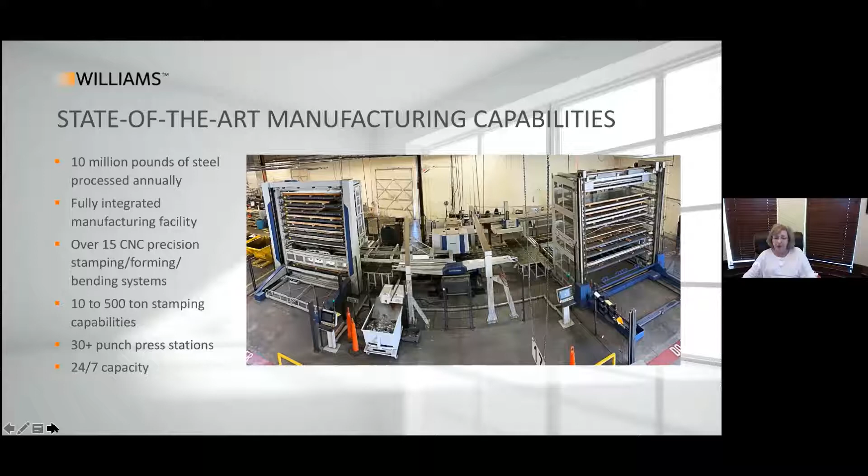Our furnaces ship in 2 to 3 days max. Fan coils at 6 weeks, but on the new fan coils we're introducing, hopefully we'll be putting those on the shelf as soon as we know what your needs are, so that those will ship in just a few days.

We do all different types of welding. We are a certified CSA test facility. So with our new furnace that we just developed, CSA can actually come to our labs and view the final product.

But you see all these wires that are testing everything. We do all of our testing in our own CSA approved lab.

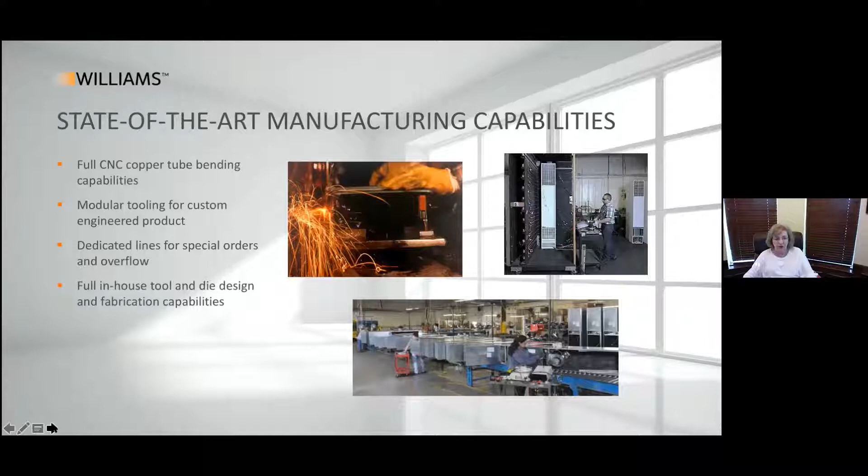Here you're looking at our factory floor where we've got fan coils down the line. These are the vertical stack units like you see in a hotel room, where you just see a grill on the wall, and that would be one of these inside the wall. Williams is a great provider for high-rise construction.

We do 100% tests on every burner that we manufacture, and we manufacture our own burners. What we're looking at here is the gas valve, the manifold, and then the burner control.

These are actually fired 3 times, and the lady runs a wand with a flame under it to make sure there are no leaks. I'm always like, oh my gosh, how does she do that? But she test fires each unit 3 times, every unit, and our burners primarily are stainless steel.

We have a few cast iron left. We're getting out of the cast iron burner business because there are so few foundries and it's uncertain how long they will be around. We primarily have stainless steel burners, and we're converting the few cast iron ones we have to stainless steel.

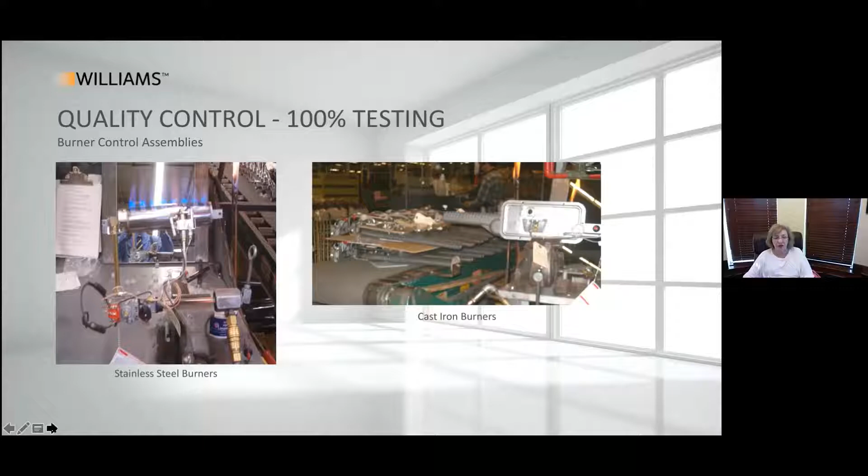Mary Jo and her team have just done an incredible job. When I look at how far we've come since last June or July, it's absolutely phenomenal.

If you find something that you think we should have on our website that we don't, please let us know, just shoot us an email. We're working feverishly to put together all the resources that are needed. Nobody wants to have to wait and talk to someone, you want the resources on a website where you can go and get them. So we're working diligently to do that.

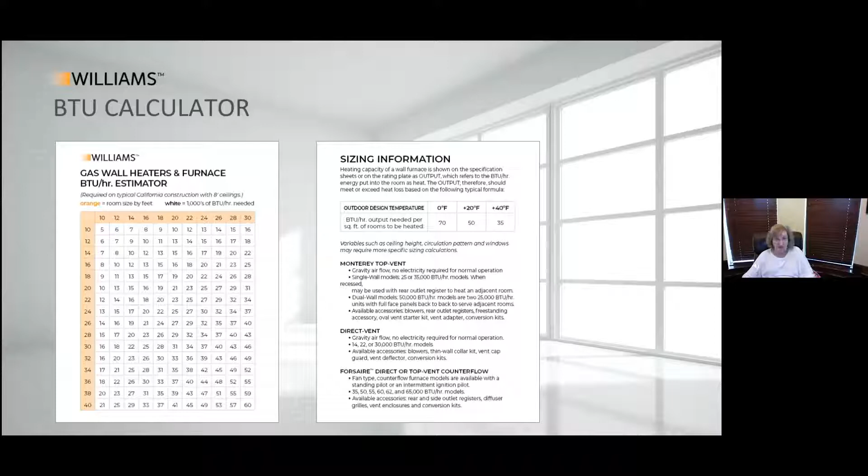Before we get into talking about combustion, where this unit is going to be placed is critical. You've got top vent units, which go on an interior wall generally, or could be a floor furnace that you vent up the side of the house or building, or it could be a room heater - those are the top vented units. Then direct vent units go on an exterior wall, because they directly vent to the exterior through a sidewall. So there are two types of products, and determining where you're going to install this unit is critical - where you have access to a gas line, and whether it's going to be on an interior wall or an exterior wall.

Of course, if you're replacing an existing unit, we do have a cross-reference, and in our exploded views we also list all the different products we have made and different model numbers, so we can assist you with those. If you have one that you're taking out and you don't know what the new model number is, we can help you with that, and we also have those listed in the back of our exploded views.

So what does it take for these units to operate, except for the electric unit? You need fuel, oxygen, and then you need a heat source or something to ignite the product, and then you have a perfect triangle for combustion.

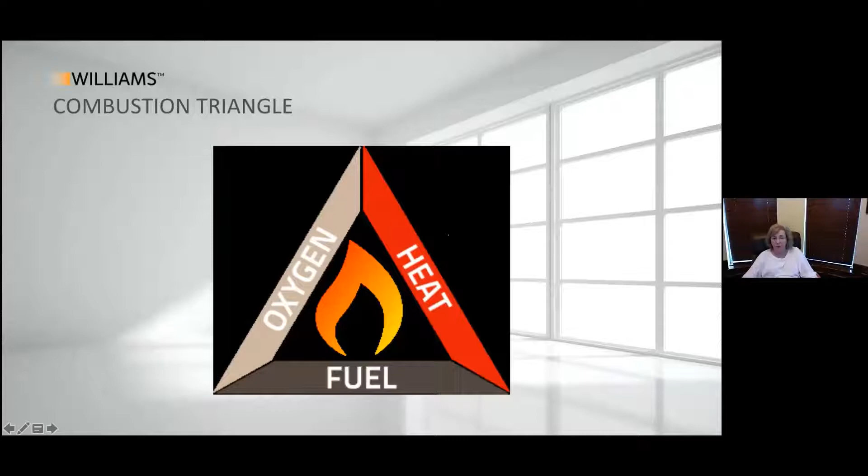When we look at the products of combustion for natural and propane gas, perfect or complete combustion gives you carbon dioxide and water vapor. We have a smiley face there because you want complete combustion. You have complete combustion when you have a nice, healthy blue flame.

If you see yellow or orange, you've got something impinging that flame, whether it's dirt, debris, maybe the burner needs to be vacuumed or cleaned, or maybe something is disturbing the environment. If you want a perfect test, just take your gas range and turn it on - you should have a nice, healthy blue flame. If you boil something over, or take a cloth that has some dust on it and shake it in the area of your gas range, you'll start to see orange and yellow particles, and the flame will not be burning properly. That's improper combustion.

When you see yellow and orange, you're going to get carbon monoxide, toxic aldehydes, and excessive water vapor and soot. When you have any of those, you have improper combustion, and it's very unhealthy.

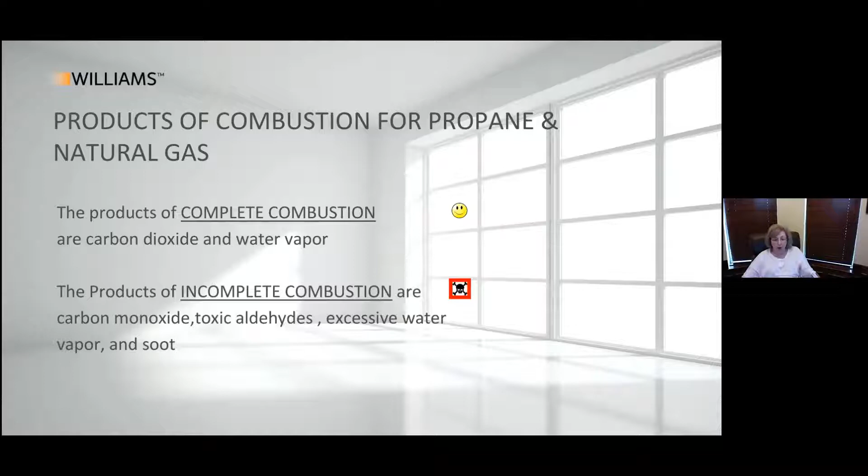So anytime you have an appliance and it doesn't have a healthy blue flame, you've got improper combustion, you've got those dangerous particles coming into the space, and you do not want that to happen. You want to get that healthy blue flame, and if you're not, find out why. It's usually dirt or debris. If it's on your gas range, it's because maybe something boiled over and it's clogging a certain area. So check those out.

What are the facts of propane and natural gas? For propane gas, the specific gravity is 1.53 kilograms per cubic meter. For natural gas, it's 0.65 kilograms per cubic meter.

The specific gravity of air is 1.205, and the same for natural gas. Propane requires 11 inches water column for the manifold pressure - we're going to talk about that a little bit later. It's really important, if you get a troubleshooting call or someone says the unit isn't operating properly, you'll find out what type of fuel it is, and then measure the water column manifold pressure. That's critical. And then the ignition temperature for propane gas is about 920 degrees, so it's lower than the ignition for natural gas, which is about 1100 degrees Fahrenheit.

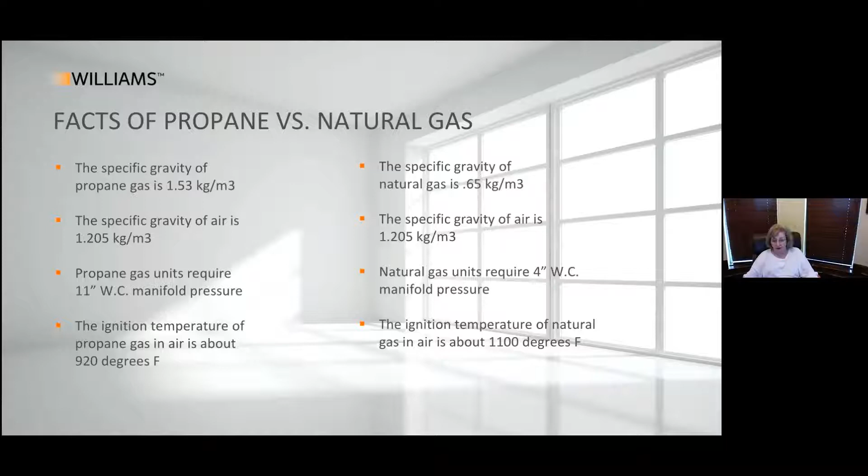So I've already gone through these earlier, but these are the different types of equipment. As I said, when you're going to be making an installation, if it's not a replacement, then you need to know, is this going to go on an interior wall or an exterior wall? And if for some reason you don't have a gas line available, remember the 31,400 BTU electric unit for those situations.

So let's talk about the venting. We have top venting, which I talked about briefly, and this would be a room heater where you're coming out of the back of the room heater and going up the side of the structure, whether it's a residence or a building of some kind. The chimney must be 2 feet higher than the portion of the roof which is horizontally 10 feet away. So if this is 10 feet, it has to be 2 feet higher. But in this case, in order to reach the 10-2, you have to come up 3 feet, because if you only came up 2 feet, you wouldn't have the 10-foot distance. So keep in mind that 10-foot, 2-foot rule, unless the horizontal line causes you to have to go higher than the 2 feet.

But then, this is going to be round B vent. Our room heaters go with 3, 4, or 5, depending on the size of the room heater. And also, if this were a floor furnace, you'd have the floor furnace under the floor with the grill inside the room, and then the venting would come out.

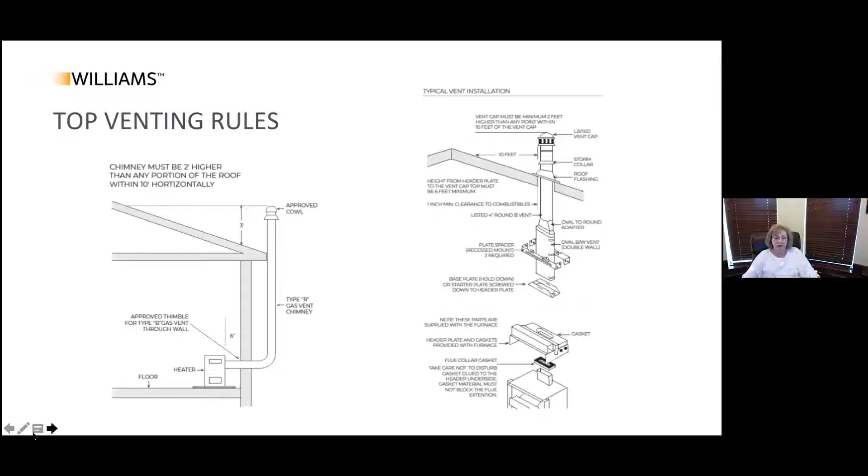And we do have oval vent starter kits for situations like this, and I think this is what's going to happen more likely than just having a straight up vent. Our competitors say that you should vent it straight up. That's not going to happen very often. It's highly unlikely that you're going to be able to go straight up in most cases, unless it was a home in Southern California that was built for a wall furnace, and then generally they go straight up.

But most of our other installations require at least one offset. You can have 2 45s, and then you need to have it strapped if you have too long of a run. And then you need to make sure there's a collar and flashing to seal around the opening in the roof.

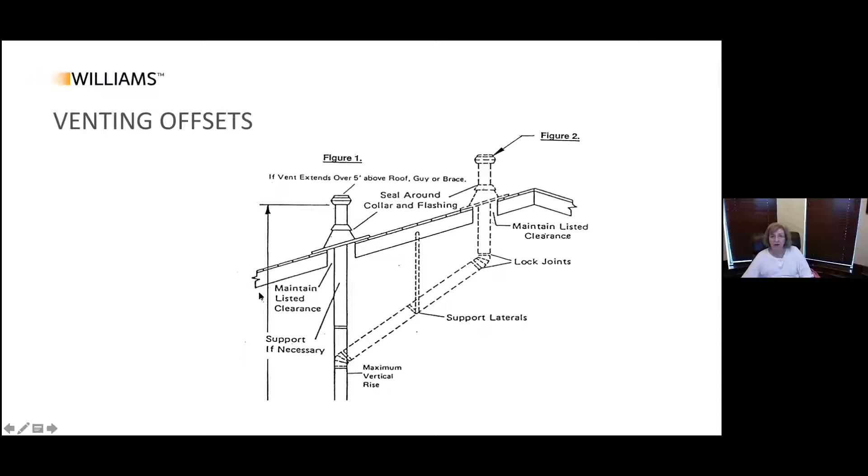The other thing we caution people on is, in the summer, a lot of times people put on a new roof or there's repairs made, and sometimes we'll get a call and they'll say, this furnace worked fine last year and now it won't stay lit. We're going to get into that a little bit more, but it could be that when they re-roofed or made changes or modifications to the roof, they did not vent properly or seal it, have a collar and flashing that seals it completely, and so they don't have a proper vent termination.

So these are the types of our top vent. We already showed you the diagram with the room heater and the floor furnace, and then the Monterey and the forced air top vents would vent just like I showed you. They would go through the roof, and they do use inside air for combustion, so the room air is actually coming in and allowing combustion.

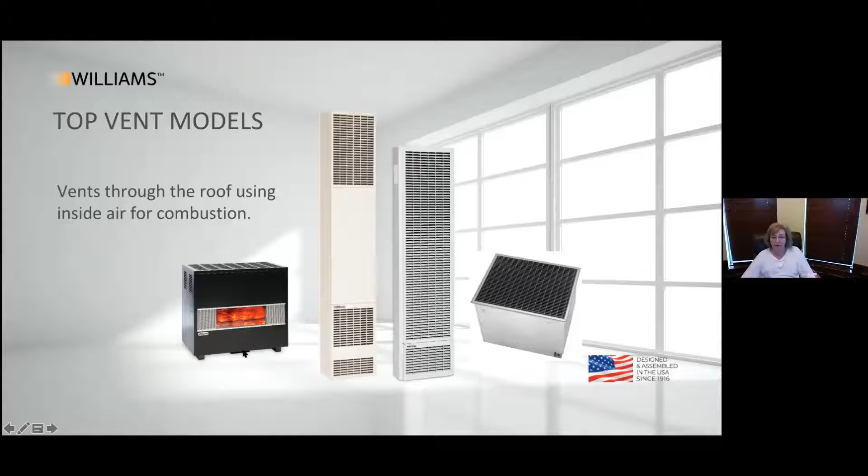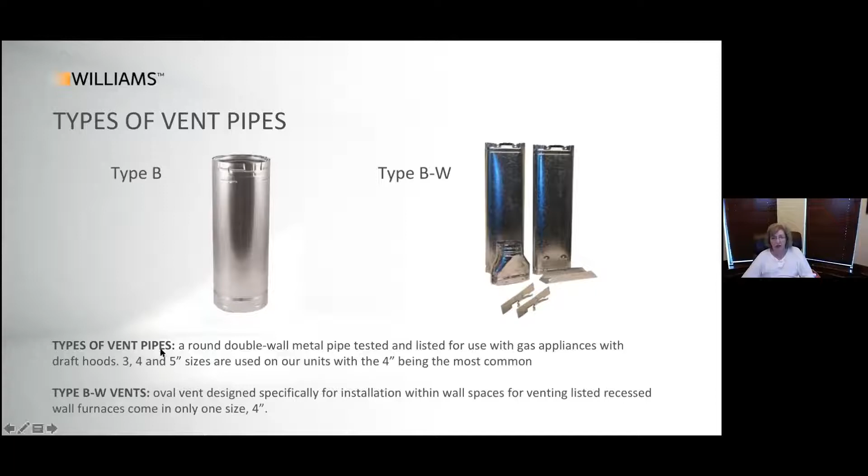So let's talk about troubleshooting. If you have a partial or a totally blocked vent system, the unit is not going to operate properly. So if you have units that keep shutting down, and we'll talk about the limit switch in a few minutes, it's probably because something has partially or totally blocked the vent system, whether it's direct vent or top vent.

The other thing, if it's a cold environment, direct heating equipment basically requires the vent material to heat up. That's why we use double wall vent pipe, because it has to create a natural draft from the heat coming out of the unit to cause those products of combustion to exit the unit. So you want to create an upward draft by the heat the unit is generating.

If the unit is being vented into a flue or chimney and it is not lined, and it's in an old situation being replaced where there was an old terracotta vent, you're going to more than likely have problems, because that terracotta vent and that chimney cannot heat up adequately for the products of combustion to get away from the unit. It also could be that the vent height is too short.

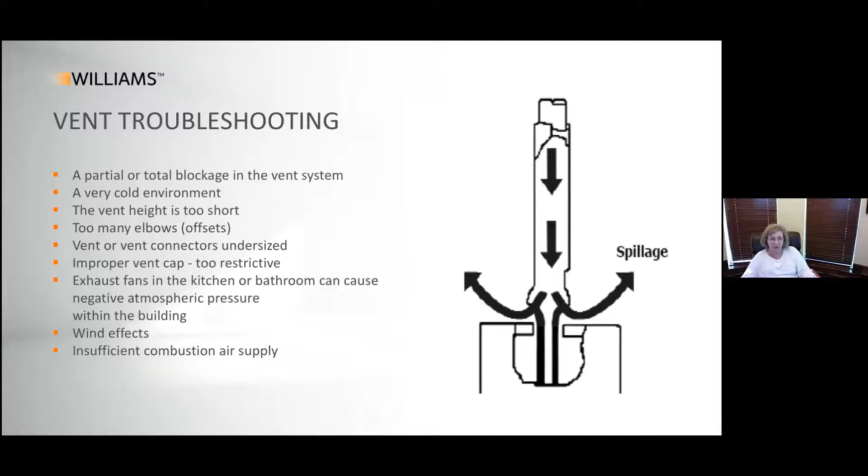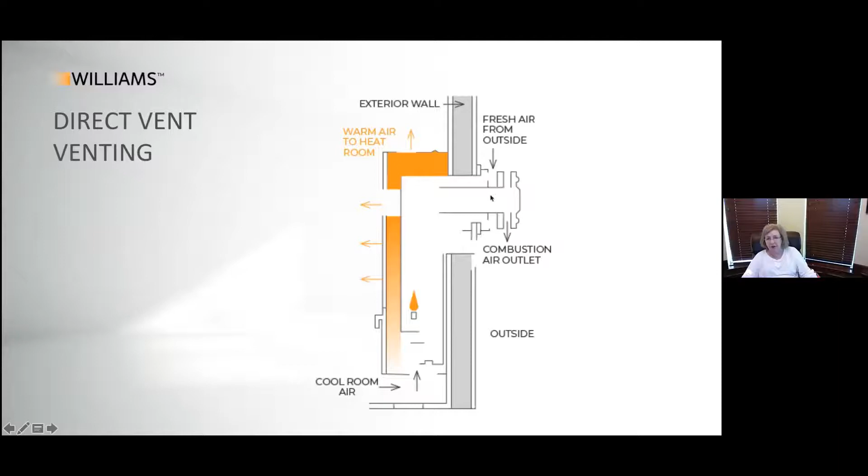Since this is a drawing, I'm going to talk later about our bird guard, which we put in every vent cap. This picture is probably the best way for me to describe where the bird guard goes - it's going to go right in here. We're going to talk about that later, but this picture is the best depiction of where that bird guard goes. This is the outside of the building, and this would be extended on the exterior of the building.

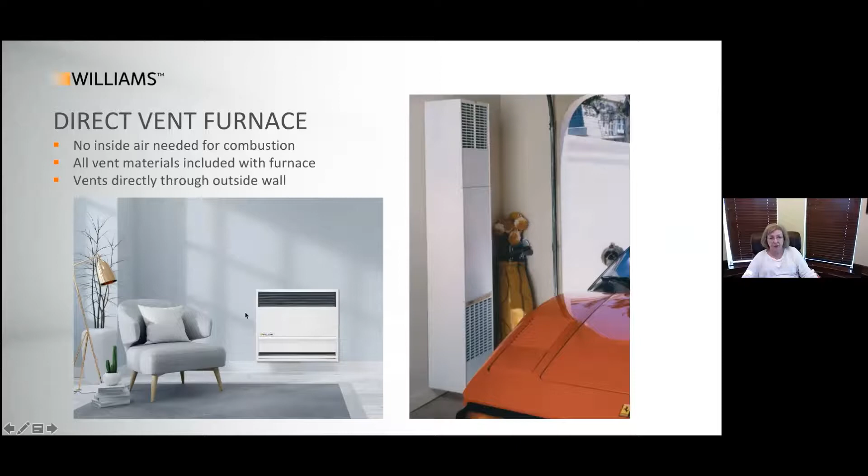This is what our direct vent would look like installed in the home. This is what our forced air direct vent would look like installed in a garage - and that's not my Ferrari, if it were, it would be in my living room. These units do not require inside air, as we just saw on the previous diagram. They come with all the vent material needed for the unit to vent properly, venting directly to the outside.

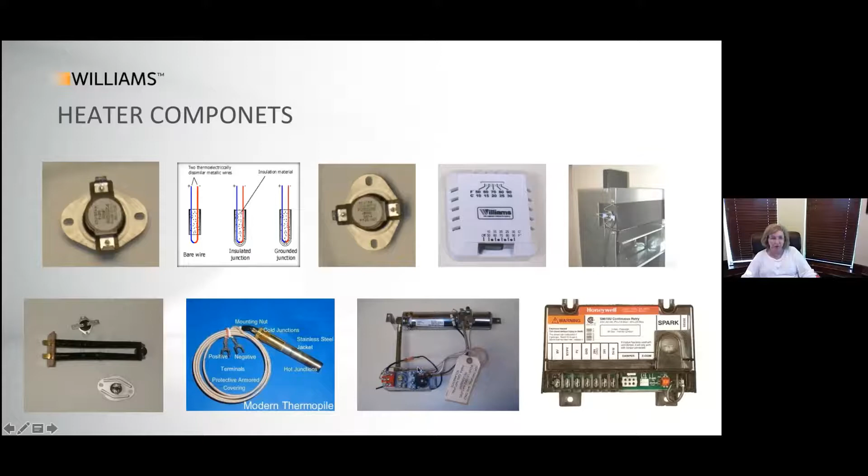The thermocouple has dissimilar metals that create the spark, shown here with the insulation, and that's what creates the spark for ignition of our equipment. As I said earlier, it doesn't require electricity for the room heater, the Monterey style gravities, the traditional gravities, the floor furnace, and the room heaters - none of them require electricity.

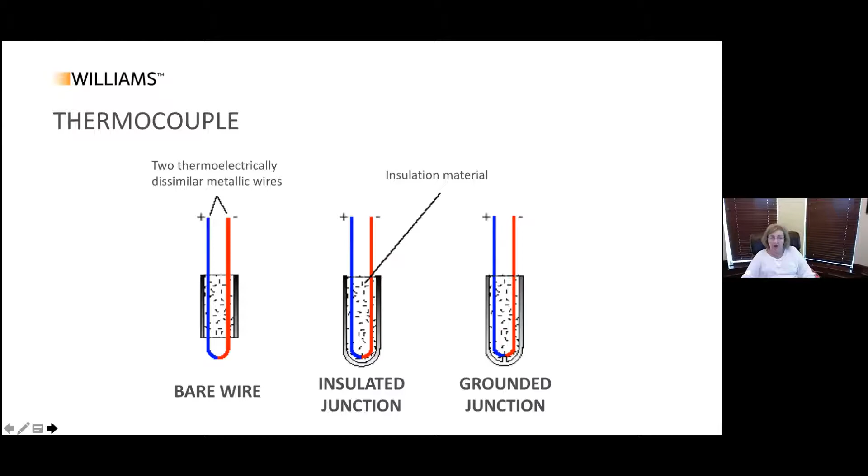If the customer chooses to have a blower, which is optional, and if there's no power, then the blower's not going to operate. But because of this thermocouple that creates the spark for ignition, these units will work without electricity. This is what the thermopile looks like, with a stainless steel jacket on it, and this is where it connects to the pilot generator. This is what our fan switch looks like.

High limit switch. This is what our vent limit safety switch looks like. We want to spend a few minutes talking about this red dot on our vent limit safety switches, which are required and were mandated in 1989 by the Department of Energy. Any equipment had to have a vent limit safety switch. If products of combustion started to spill into the space, that's why some people call it a spill switch or high limit switch. There's all different names for it, but that switch has to shut the unit down if products of combustion start spilling through the vent system back out into the space.

On a direct vent, you have a concentric sealed vent, and that won't operate if it's not perfectly sealed and doesn't have perfectly matched vent material. The unit won't operate. It's designed not to operate unless it's sealed combustion. So on all top vent equipment, there has to be a limit switch or a spill switch.

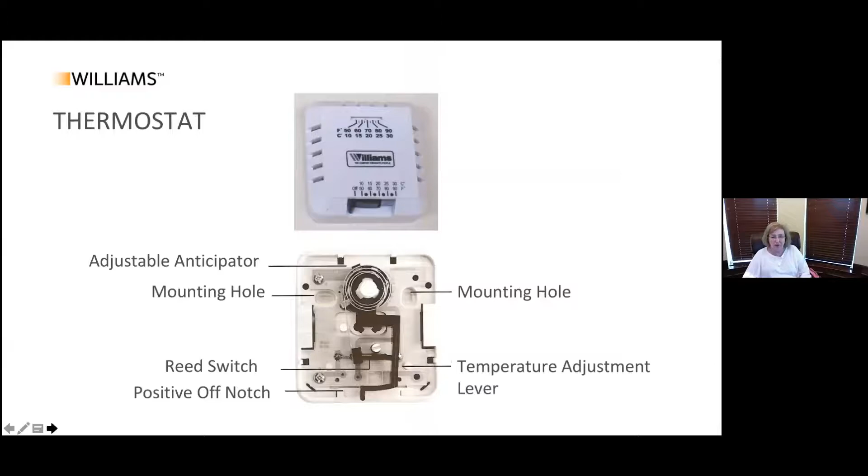This is what the thermostat looks like. We stopped including the thermostat with our units because we found a lot of people weren't using them. We still offer them, but this is what it looks like. A lot of people want a more sophisticated thermostat, and we're delivering on that with our new furnace that we're going to be sharing with you.

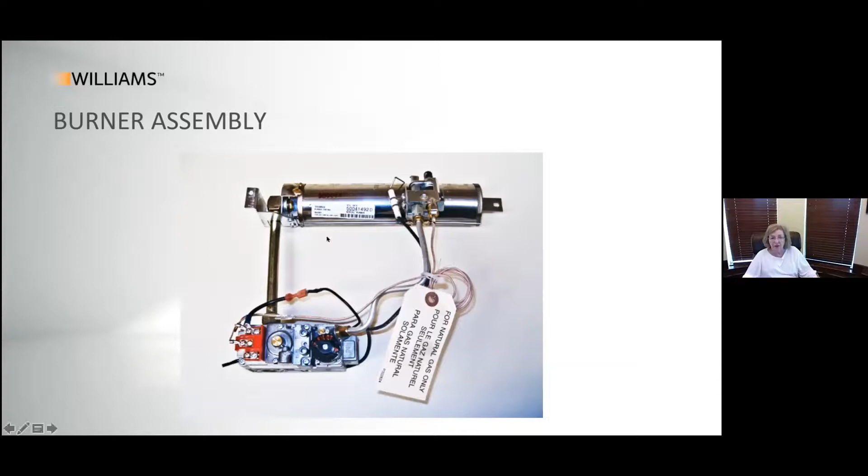This is what the burner control looks like on our top vent Monterey style. This is your gas valve, this is your manifold, and that's your stainless steel burner, and this is your pilot generator. This tag is in French, English, and Spanish on your burner control. Also, every burner control has an actual burner number, though it's hard to see. This is your model number and this is your serial number. That's on every burner, but it's also in several other places. If someone can't find the number, it's on the burner control, and it's also on the rating plate that's on the unit.

Let's talk about that limit switch. Here it is mounted on the furnace, and you see the little red dot there. Our Monterey, for those of you who don't know, was our first product, our original product. We've been making it since the mid-40s, and before that, we made radiators from 1916 to 1943. But we also brought Cozy and Empire into the business. The Monterey type, the gravity wall furnace, as we make and as they make it—years ago, we had an open face draft hood right here, a big hole.

So the heat came off the heat exchanger, went into that open face draft hood, and the products of combustion went through the draft hood and out through the venting. When we started having nuisance outages with our Monterey, we decided to patent the draft hood. This is the patented draft hood, and this is the neck of it. We have side relief openings, like the little grills on our Monterey wall furnace. So you have dilution of the heat by 50% on each side, so you don't have as much heat hitting that vent limit switch, which makes it operate a lot more efficiently.

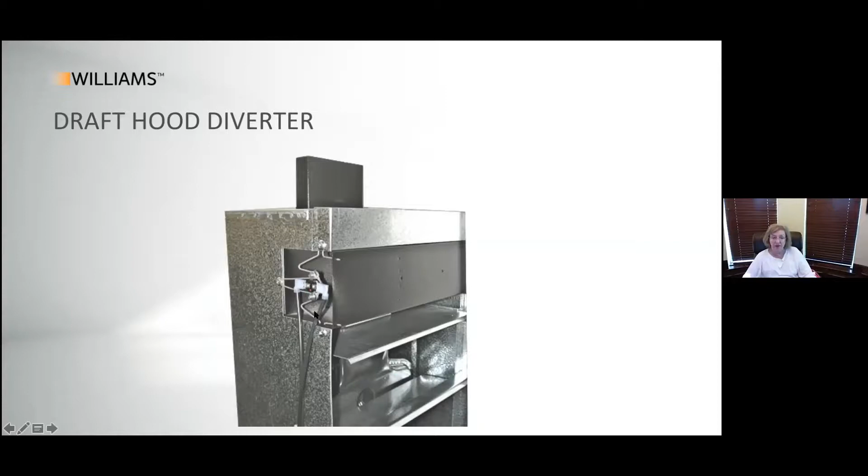These are just the wires that go down to your thermostat to tell the unit when to turn off and turn on. Then we have our intermittent pilot module. This is what would be on our intermittent ignition or spark igniter unit. This has no standing pilot, which is what our new furnace coming out is, because nobody wants the energy being consumed to run the standing pilot all year.

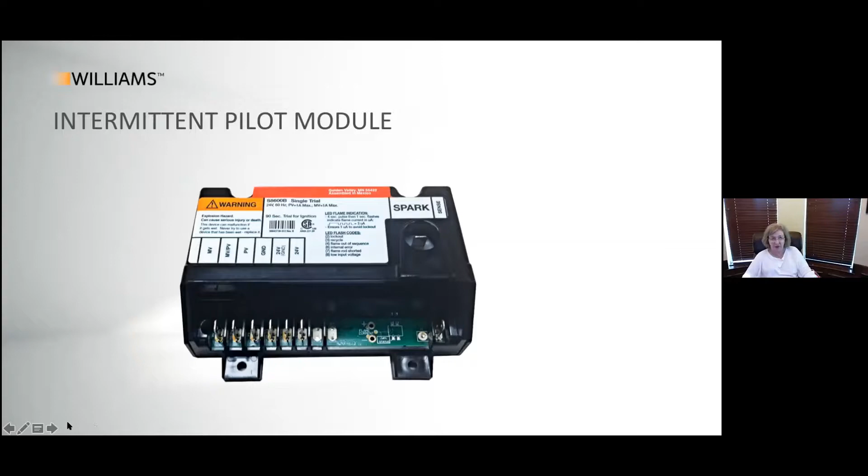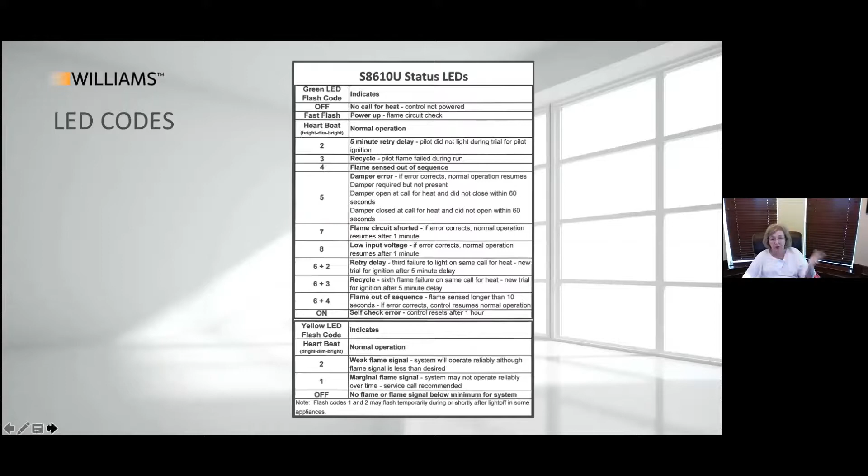So this is a spark igniter or intermittent ignition module. And then we've just added, I didn't even know that we didn't have our codes for troubleshooting, the green and yellow flash codes. So we do have that now on our website. And Mary Jo will provide this presentation to you to be able to share with your customers and with other people within your companies.

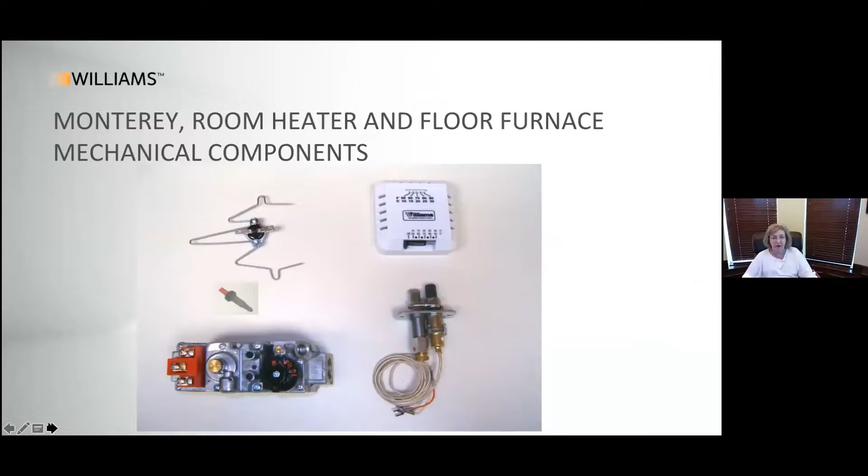This is what the Monterey, the room heater, and the floor furnace mechanical components look like. That's a close-up of the vent limit safety switch, the thermostat, pilot generator, the gas valve, and the piezo igniter. Everything comes with the piezo igniter to make it easier to light, so it's just like your gas grill - you don't have to have a match or a lighter.

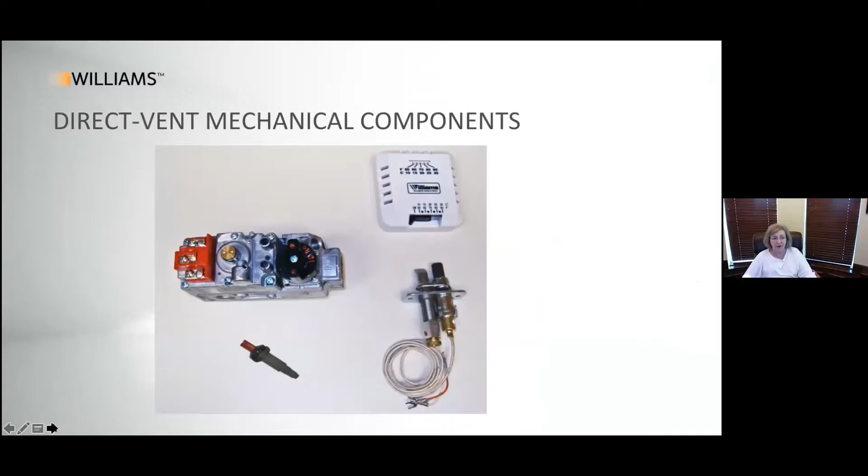We have lighting instructions with every unit, and they should always go to the very bottom of the unit. There's a long chain on that, and the reason for the length of the chain is determined by CSA. That's not something Williams has any control over. The composition of this tag, the wording of the tag, and the length of the chain is all determined by CSA, and that's a requirement for every unit to pass testing. But we've seen situations where people will stick them above the burner, get really creative where they're going to store that tag, but that tag needs to be on the lowest portion of the equipment.

And then there's a gasket material that goes all around that. More than likely, if you take this apart, you're going to compromise that gasket, especially if the unit's been used for a while, and then the contractor decides he wants a closer look and takes those screws out. Really, that is not necessary.

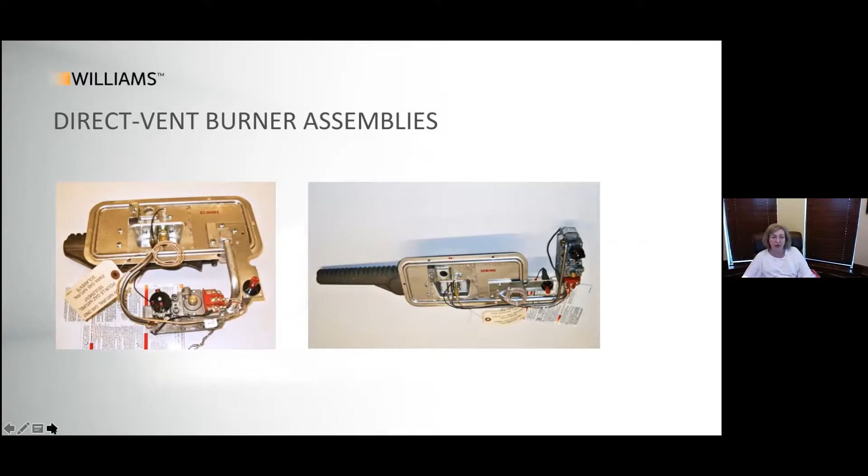On the direct vents troubleshooting, the big thing is the gaskets need to be replaced if this plate has been removed, and if that peephole has been removed frequently. There you can see the white gasket material there, and you can actually see a little bit of it here, but those gaskets have to be in perfect condition to get a complete seal so that those units can operate properly.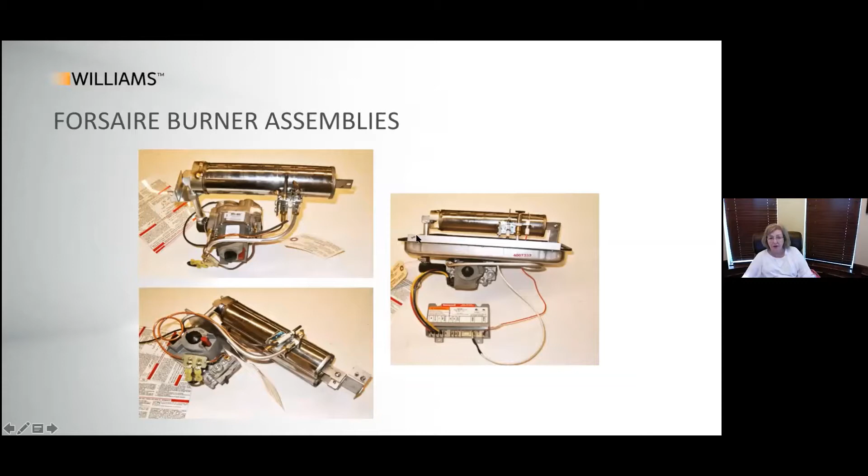This is what the Forsaire burners look like. Here again, this would be the direct vent, because that has to be sealed also. And then this is the room heater burners. We have the smaller size because they come in from 20,000 to 65,000 BTU, but pretty simple design.

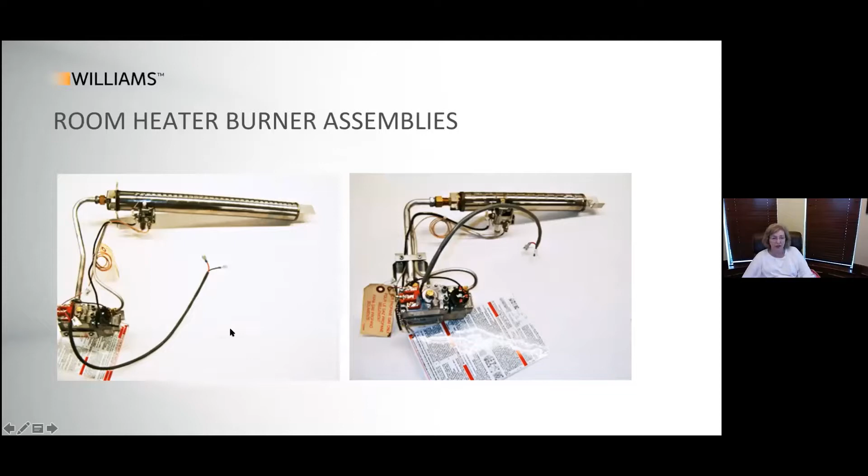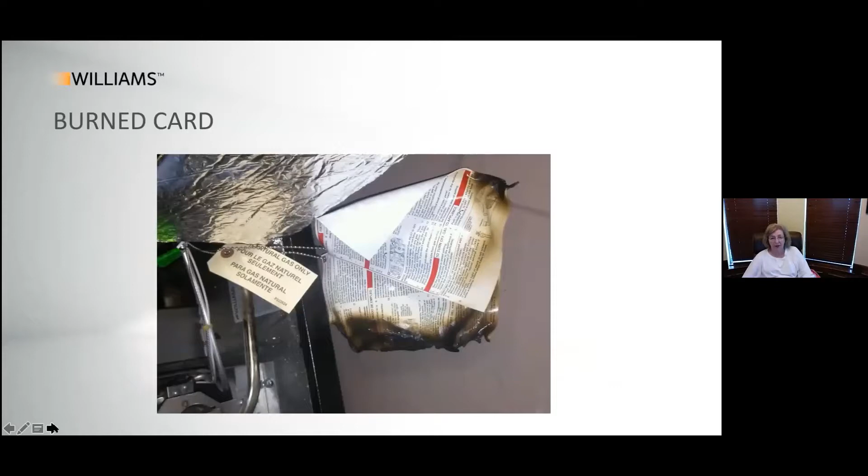Most of our burner controls have very similar designs. Here again, you can see the lighting instructions and the chain that should be at the very bottom of the unit. This is what happens when they're not stored at the very bottom of the unit. We don't want that to happen, and nobody wants that to happen. But anyway, it's really important that that chain be at the very lowest portion.

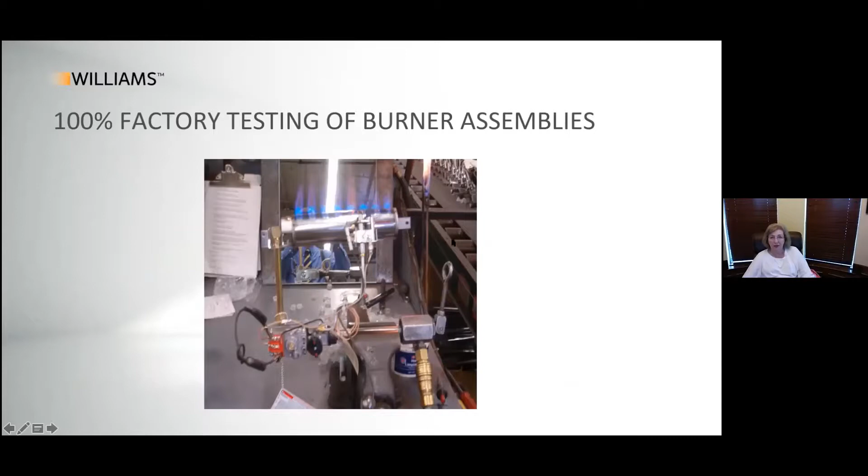As I already mentioned before, we do 100% tests on every burner. You can see all the burners lined up there on the assembly line, waiting to be tested. So let me see how I'm doing on time.

I better talk fast. This is what a Monterey installation looks like. You've got to make sure you have all your heights correct. When the unit is installed in the studs, they're usually installed in the stud space, 16-inch stud space on center, and the legs are going to be attached. It slides in, goes up through the top of the header, and then it gets nailed into the 2x4s. And that you do not want the legs to be bent or bowed.

Expansion noises from Monterey is generally the way it's been installed. Not just the Monterey, but others, but we'll get into that. But it's really important to pay attention to all the dimensions and the heights, because if the header is lowered, then you're going to force that unit into it. The actual neck of that heat exchanger, you're going to force that into that header, and then when that unit tries to expand and contract, it can't. It's critical that the header be exactly where it is supposed to be, which, Hector, help me out here, 62¼ inches is where the exact height for the header. That is correct, yes. Thank you.

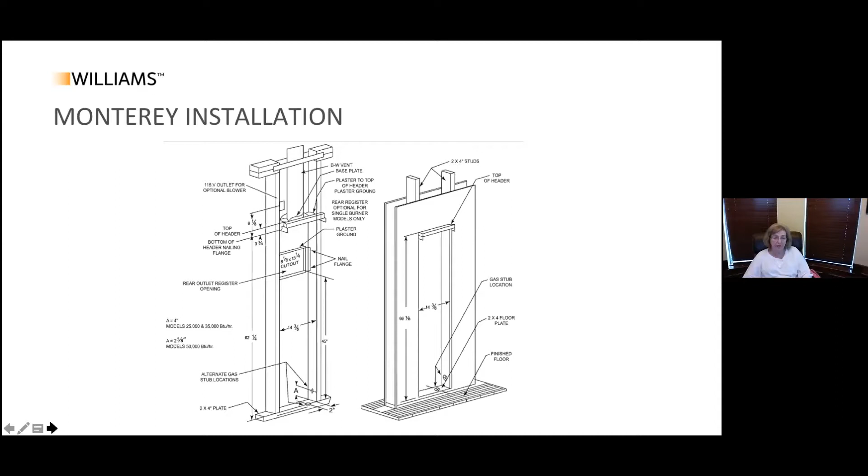Okay, with the direct vent, the traditional direct vents, we actually provide a template. It is critical to the operation of the unit that the template be used so that the opening for the vent is going to be centered and accurate. It's really important because if that isn't centered and accurate, then when you have legs, they're really not legs, they're just strips that make sure that the height of the unit is correct. But when you position the unit on the inside, if that opening isn't the correct height and the unit comes up and it can't perfectly align with the vent tubes on the outside, when that unit starts to heat up, you're going to have expansion and contraction noises.

Because the components inside of the unit need to be able to move. It's amazing how far the components inside of a wall furnace move when they heat up and cool down. But it's all strategically aligned so that if it's installed properly, it allows the movement of the unit to expand and contract for a very quiet operation.

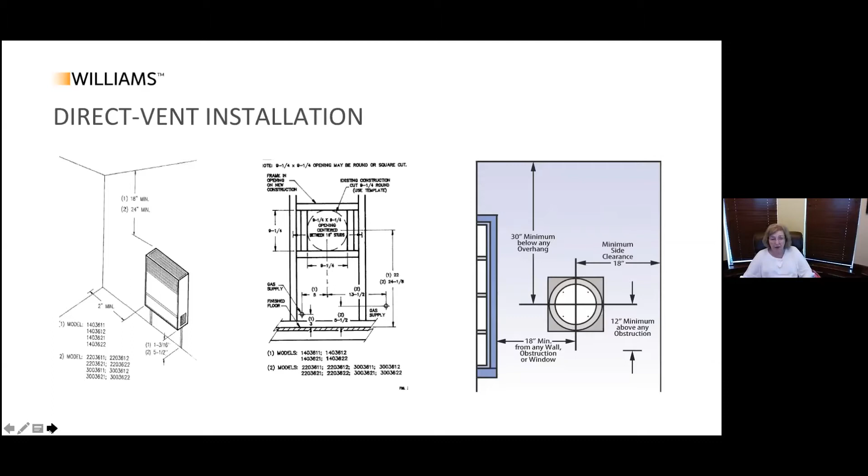Also, when contractors are making installations, it's really important when they fasten the unit to the wall that they not go through two thicknesses of metal. In the installation instructions, it calls out exactly how the unit should be mounted. If they're not mounted properly and they just run extra screws, or nails, mostly it's screws because they have power screwdrivers, but if they run it through two thicknesses of metal and then the unit starts to heat up, those metals try to expand and contract and they can't. And you'll have that binding and then it's gonna pop. So it makes a loud noise. It can sound like a shotgun. It's unbelievable when metal is heating up and it wants to expand and you're trying to restrict it.

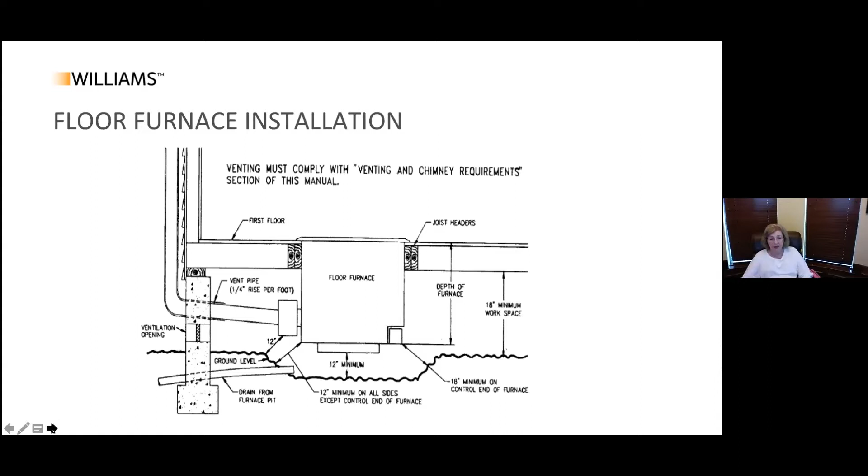I mentioned briefly about the floor furnace. This is the floor inside the structure. It just has a grill. And then you've got the vent coming out from the draft diverter and up the side of the structure and then terminating at the height that it needs to.

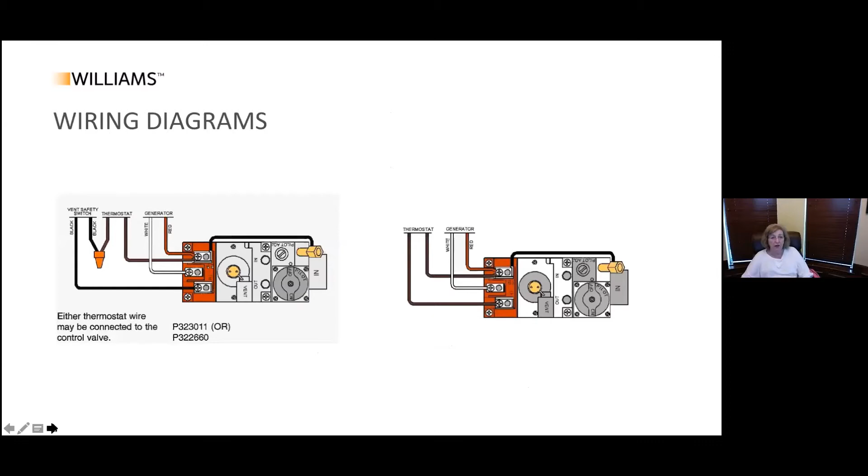This is what the wiring diagrams look like, where the thermostat would attach and the limit switch. This is what our product identification looks like.

Okay, now we're coming to the fun stuff. This is the new baby. We're calling it the AC2030. It's an exact casing of the existing units. It fits in exactly the same place, so it has the same fit and form. It does not have the same function.

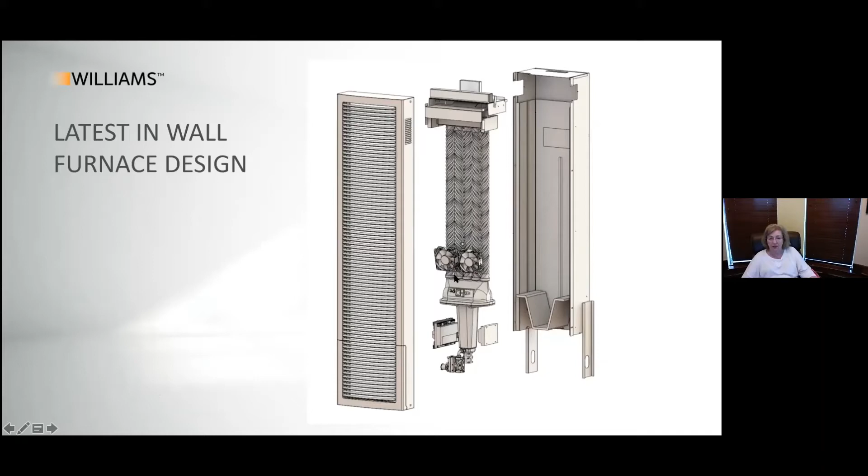It looks totally different. Remember, that's just a heat exchanger - it doesn't have blowers, it doesn't have controls. It's totally different. It has superior comfort and efficiency. Our current model is 70% AFUE. This new baby is 82% AFUE.

Ultra low NOx - currently, 14 nanograms per joule is the highest you can have if you want to meet the Air Resources Board emission standard. But ours is 10. We've had it as low as 2. It really depends on where it's installed. But it has dynamic response.

We're calling it the AC2030 because it goes from 20,000 to 30,000 BTU based on the needs of the environment. So when you set the thermostat or the temperature that you want, the unit will read what's needed and it will modulate, actually changing the mixture of fuel and air - I'll show you a close-up of that in a minute - to deliver what's needed for the space.

There's no standing pilot, so it eliminates seasonal relighting, saves energy, and eliminates methane emissions. Very easy to install - it installs with the same vent material right in the same space. It does have fans that operate constantly to deliver comfort and air circulation. It has a programmable thermostat for savings and comfort.

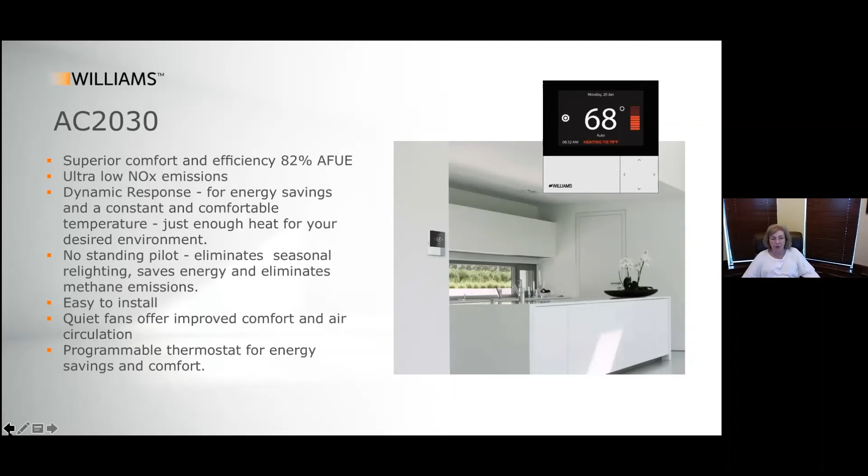So let's take a close look. This is what it looks like. You have the gas coming from the main proportional gas valve. You have a combustion fan, and this is where the magic occurs. This is sealed combustion, so this could also be used in a garage. This mixing chamber - this controller is constantly reading the air and fuel mixture to have a perfect burn.

You have a burner plate, and then the combustion chamber, hot surface igniter, and then we have 5 twisted tubes that make up the heat exchanger - not just one heat exchanger like we currently have on our other units, but this has 5 twisted tubes, and that's what delivers the heat out into the space. You can see the draft hood is very similar in design to what we currently have, and then it has the spill switch.

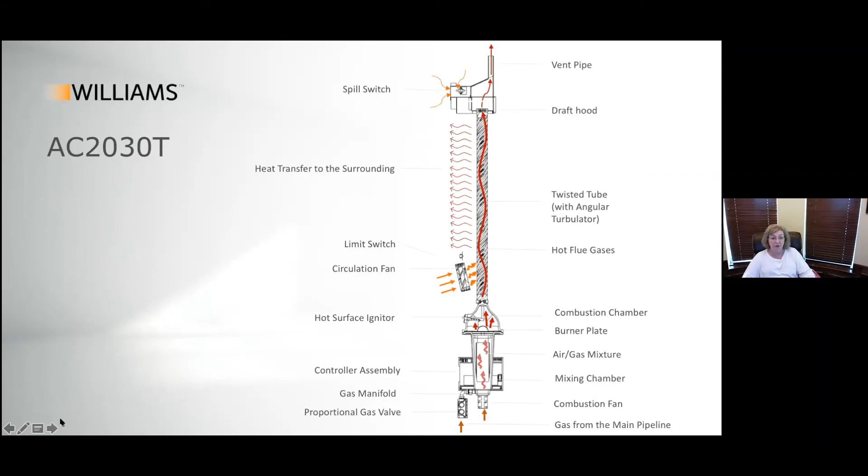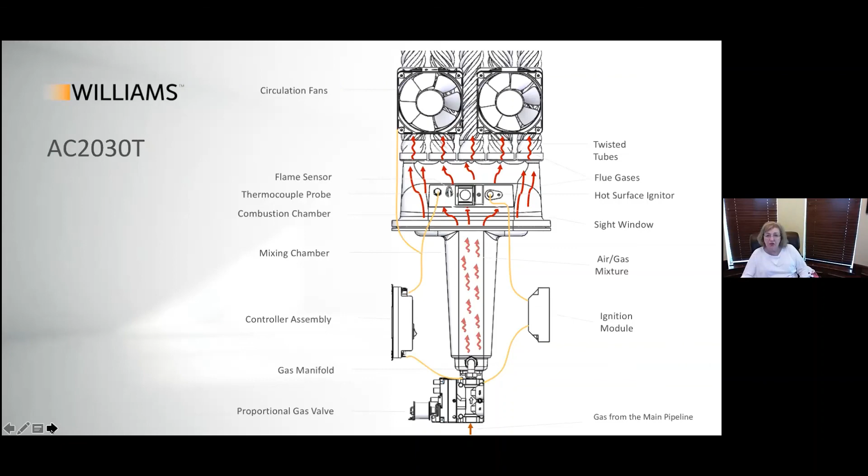We're very excited about this new technology. There's a close-up of what it looks like, and we're so excited that it will be available. Also, for those of you not in California, this will be another alternative to our forced air unit. We've never had anything that would be 82% efficient, meeting all these other standards, and we're really hopeful that we can change the world of direct heating equipment with this new technology, not just this unit, but future units to come.

Thank you all for your attention and your participation. I'd be glad to answer questions. We do have a troubleshooting guide that we've added on our website. So we have troubleshooting, and we have a troubleshooting guide on our website. What questions can I answer?